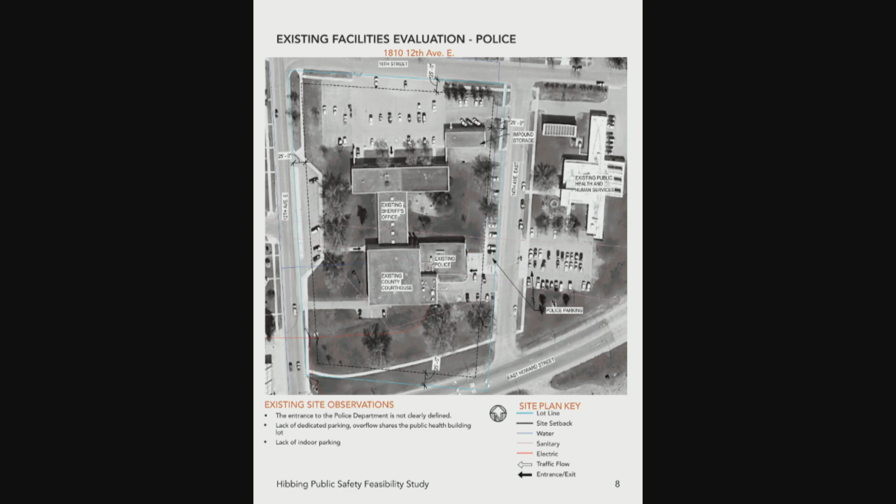However, police vehicles are currently stored outside. There's no indoor parking, so they're left running year-round when they come to the facility, and then they also park across the street in the Health and Human Services lot. There's confusion on signage for the facility, on where the entry is and how to access the police department specifically.

A few examples of deficiencies within the police department itself: the evidence storage room is on the lower level and is about a third of the size the department requires. Weapons storage is also taking place within the evidence room. There's no dedicated evidence processing room with adequate ventilation, and no refrigerated evidence storage for long-term evidence.

The training room is not a dedicated training room, rather just an unfinished space where they hold training, also shared with riot gear storage, a weapons cleaning table, and open to evidence processing. There's also no indoor vehicle storage, so vehicles are stored outside. Their current fitness room just took over what was previously a locker room, so there are no dedicated male-female locker spaces within that facility.

All in all, the police program's square footage needs are about double what they currently have. With the current facility being owned by the county, there's not an effective way to remodel the space to improve function. Either an addition on the current building would be required, but that would cause significant disruption to operations of both the police department and the sheriff's office. Since the facility and site are owned by the county, that would be a significant investment on the city's part into a facility the city does not own.

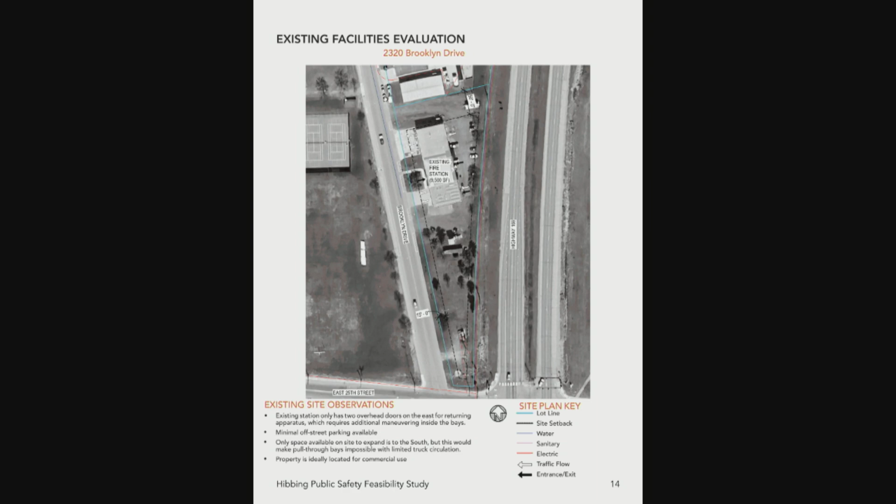They also currently have two volunteer stations located elsewhere, whereas a new facility could join operations and improve efficiency.

Some of the current issues the fire department has are accessibility issues. The bays are undersized for the current standard fire truck, so the department is faced with ordering special equipment because the doors are undersized. The clearances between trucks are too small and can cause circulation concerns. A lack of storage expands all their stored materials into the apparatus bays, into the day room, onto the mezzanine, and it's not readily accessible for emergencies.

Mechanical systems are not isolated. In a modern-day fire station, we would see apparatus bays mechanically isolated from office spaces and sleep rooms for the safety of the fire department. Carcinogens and diesel exhaust circulate through the ventilation system and can cause major health concerns for the fire department and first responders. That is a deficiency in the current facility that would require a significant overhaul of the current structure, which would really be financially limited.

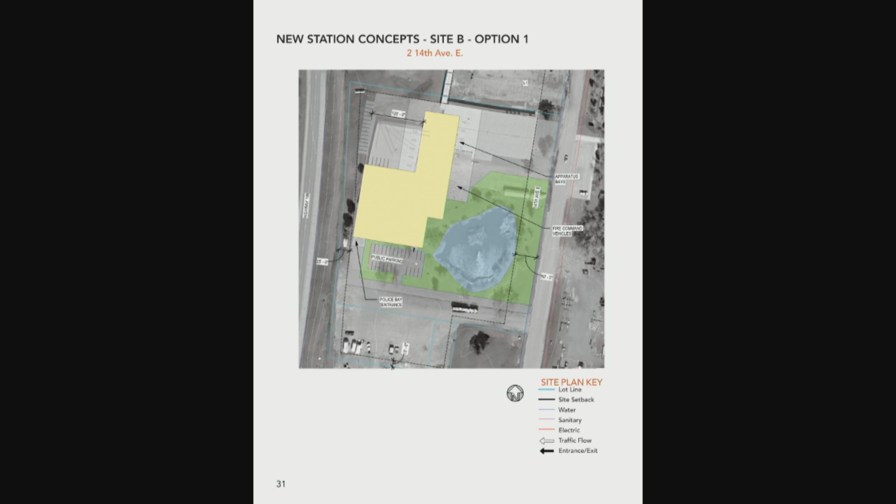At a high level, the Hibbing electronics site is limited due to an existing storm pond on the property. However, there are two different configurations that we felt, in plan view, could accommodate pull-through apparatus bays and separate departmental access in a safe way. There are other limitations, but we determined it could be feasible. There's another layout there—without getting into specifics, it could be feasible.

Another site we evaluated was the public works site, and this one is much more challenging due to existing public works operations and the grades on the site, with an open lower level and higher levels on the south side, and how to address those to achieve proper vehicle circulation. Because this site was more challenging but did meet all the criteria we mentioned, we dove deeper to really determine if it could work functionally for each department.

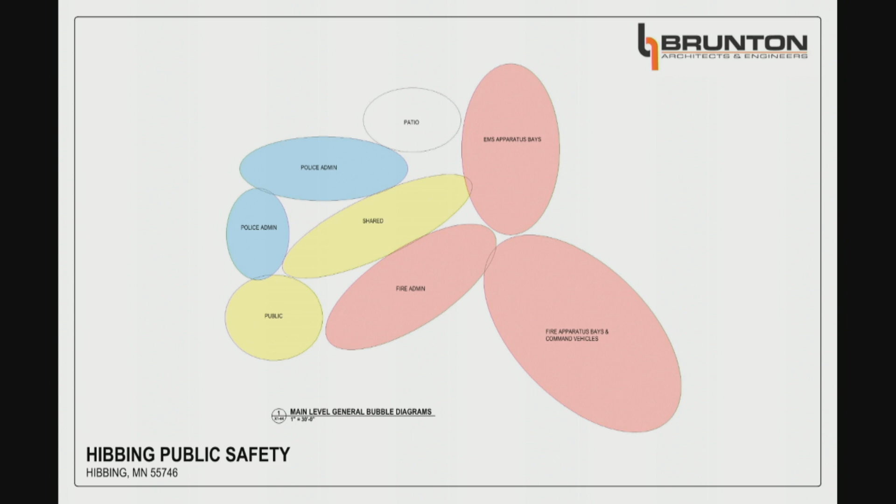You can flip through these. We started with simple bubble diagrams to understand what adjacencies within the program, and how they could lay out on any site. Then we refined those bubble diagrams into block diagrams.

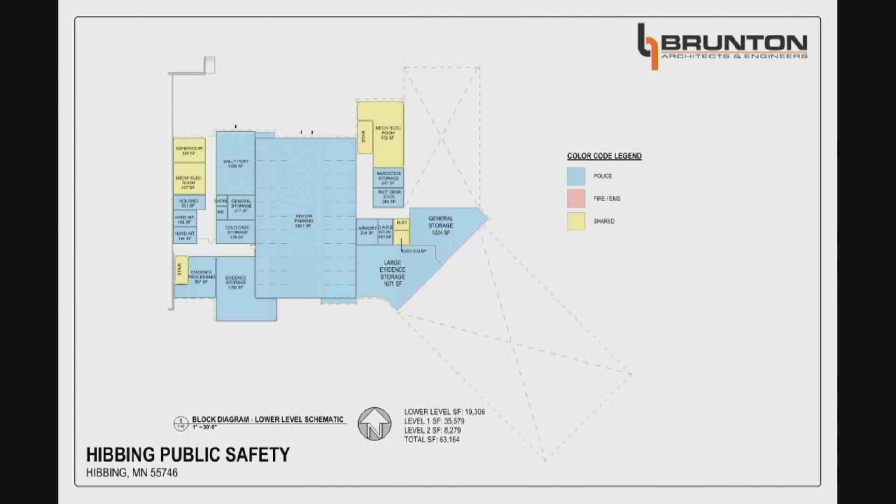What we determined is a lower level police parking garage would be feasible on this site, with access on a private side on the north without visibility to the public. This lower level could also account for evidence storage, equipment storage, and building mechanical spaces. The first floor, accessed on the south side of the property, would house the majority of administrative spaces for police, fire, and ambulance, as well as shared training spaces and a fitness room. All of the apparatus bays and ambulance bays would also be located on the first floor for emergency response.

Essentially, what we wanted to prove and determine with these block diagrams is how we can make the building as compact as possible to reduce ultimate costs. When you have a very compact building envelope, the building structure itself becomes more efficient, and we want to make sure that meets the expectations of the budget and the program.

The second level, again trying to reduce the footprint as much as possible, could house fire sleep rooms and day rooms, as well as extra storage for mezzanine space.

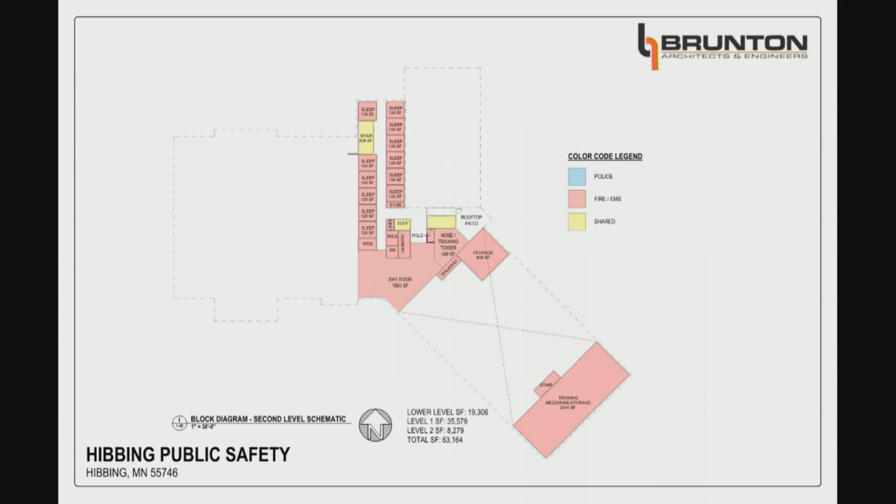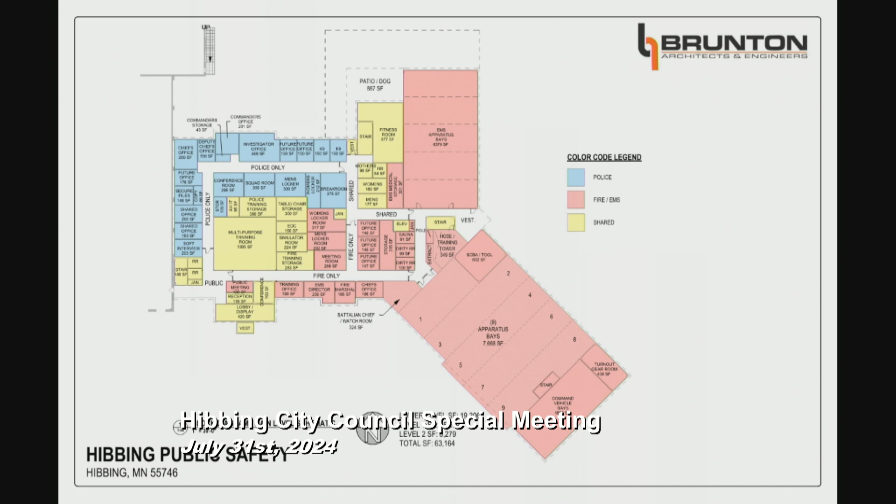The lower level right now is about 19,300 square feet. Level 1 is approximately 35,600 square feet. And level 2 is about 8,300 square feet. So the program was 65,000 roughly, but the block diagrams got us to about 63,000. So there's additional refinement that comes in further stages of design to see if there are even other efficiencies we can find to bring that down.

Are there any other questions? Mayor?

Yes, I'm just curious in the design of this, has there been thought put into the pathways of emergency vehicles coming in and out of that location? It seems like the public safety building location has been thought about the most. Has there been discussion around how the emergency vehicles can come in and out of there?

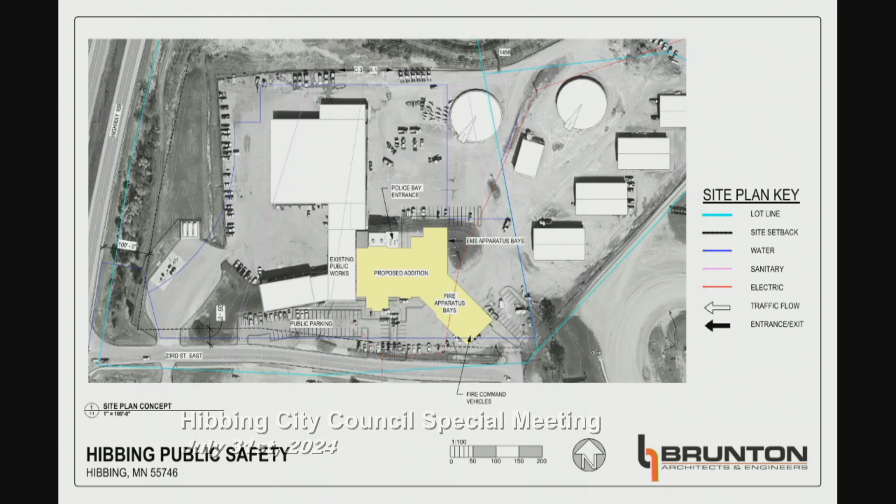One other thing I'd like to mention: this proposed yellow shape on the screen is being illustrated as a building addition on the existing public works facility, but that building and design could easily be located along 169 on a fairly flat lot, with an underground parking component that functions the same way those three floor plans are illustrated. The building could look exactly the way it's illustrated in the renderings.

The reason we dove into that was because we felt it had potential either on a new flat lot or as an addition onto the public works facility. That's why we spent the time on that, to vet it out.

By doing that, we took the 65,000 square foot space allocations that were in the programming document and found that we can actually get it down to 63, and we're optimistic we might be able to get it down even lower. So we know that the square footages and the structure and the concept behind this are real and doable.

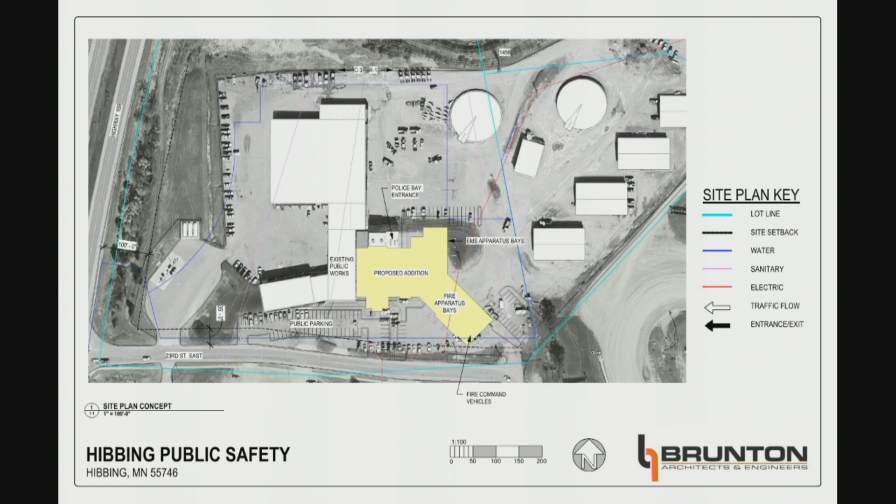And Patrick is here from A&P to be able to talk a little bit more about that.

Councilors, any other questions at this point? Right, thank you very much. Strong work, thank you.

Actually, go to the—perfect, great. Perfect, yep. Good evening, everybody.

I'm Patrick Sims from Adolfson and Peterson Construction Company, construction manager for the project.

One of our main tasks right now is to provide estimating services for the project, to check the pulse of the budget and see where the project is tracking, ensuring it's tracking toward the budget that's been set. Even though at this point the design is at a 50,000 foot level, we understand there are decisions that are going to be made now based on the budget, based on the dollars.

Our team works very hard at taking a concept drawing like this, a block diagram, and really boiling it down to get from a 50,000 foot level to a 5,000 foot level, if that makes sense.

The way we do that is we work very closely with Brunton to gain an understanding of what they feel is going into the building from a material selection standpoint, structure type—whether it's precast panels, block and masonry, those types of things—to make sure we understand from a cost standpoint what materials we're pricing when we start to pull the estimate together.

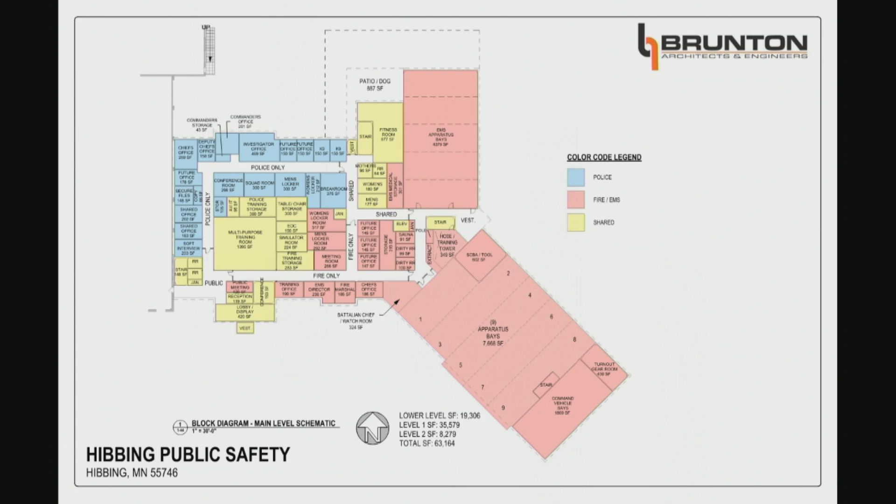At this point in time, what we've been able to do with Brunton and our team from a cost standpoint, we're confident to report that we're tracking on the project budget right now. As Jeannie mentioned, we have a long way to go with this project. There's a lot of variables out there that need to be discovered at this point. Obviously, the design is going to continue to get refined.

At each step of the design, between schematic design, development, and eventually construction documents, we're going to provide another estimate, and we're going to go back through this process again of meeting with Brunton, understanding the project, making sure that the costs we're putting out on our estimate represent the materials that are going to be constructed. So, a lot of variables to come, but we'll deal with those as we go and include them in the cost estimation process.

We did look at a new site as well, and a new building on that site would also track towards that project budget. So if the city makes that decision, that direction, we feel the budget can support both options.

Very good. Councilors, any questions?

I'll just mention, you just finished up Chisholm's new facility. And that was a process too, and it seems like you did a nice job coming through budget-wise. So how will that process, being a little smaller of course, relate to our project if we move forward? Well, I think the main benefit on your project is we're involved earlier in the process. We were involved in Chisholm a little later, the design was kind of further down the road, so we had to reverse engineer the cost savings a bit.